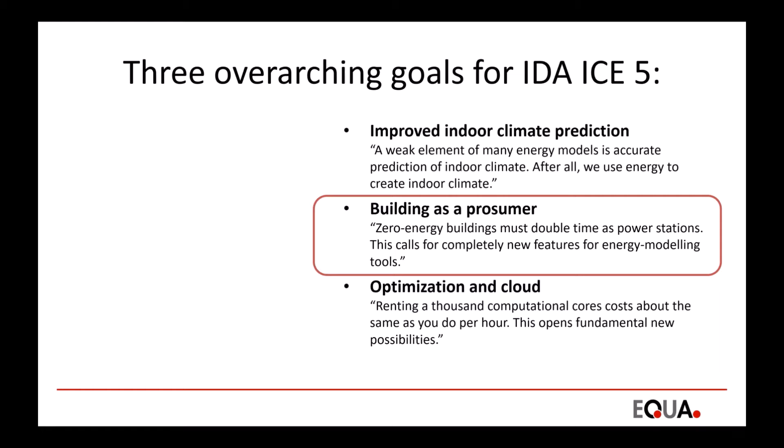Right, so IDEIS in the new energy landscape. I guess it hasn't escaped many of you that we're likely to have to change a lot in the way we live in the whole world. And as you know, buildings use a very large proportion of the energy flow in the world, and so we have a big responsibility on our shoulders. And in most building regulation schemes, there'll quite soon be a requirement for zero energy buildings. So what has been quite exotic so far will very soon be a reality in many places.

And in order to create a zero energy building, in most cases you will have to rely on PV. So that means that large portions of the surfaces of the building will be covered by PV. And that means that we can't just put PV like it has been mostly today in favorable and unshaded conditions, but we will have to put PV almost everywhere on a building, and also on partially shaded surfaces. And this is not so easy, as you will find out later; the shading of PV is far from a trivial issue. This is one of the big things we will talk about today.

And another reflection, I think, is that so far we've aimed at being able to predict energy use of a building as accurately as possible. We're talking about a few % off and so on. But on the other hand, so far when we've looked at the yield from a PV system, we've been happy with just getting some order of magnitude figures. But in a zero energy building, the PV yield will be just as important to get accurate as the energy use of the building. So that's something to bring with you as well.

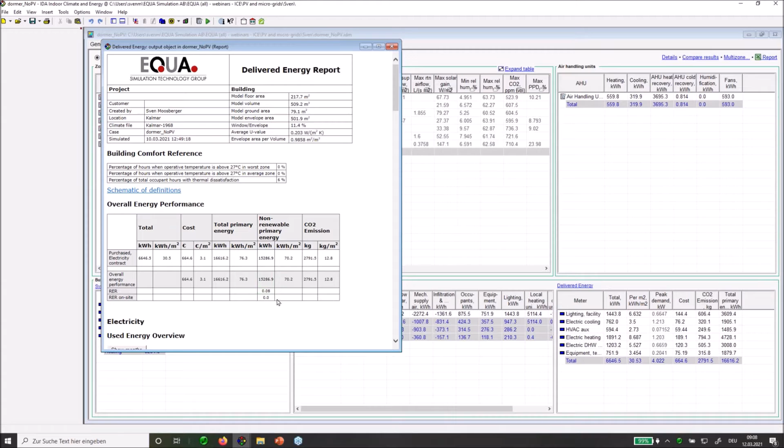So you see we have a use of 6.6 megawatt hours per year. We have the costs here, and due to the weighting factors we have quite a lot more primary energy need, so we have this factor of I think 2.5 here. There's also a renewable energy ratio, so the part of renewable primary energy that we use is just 6%, so it's not a lot.

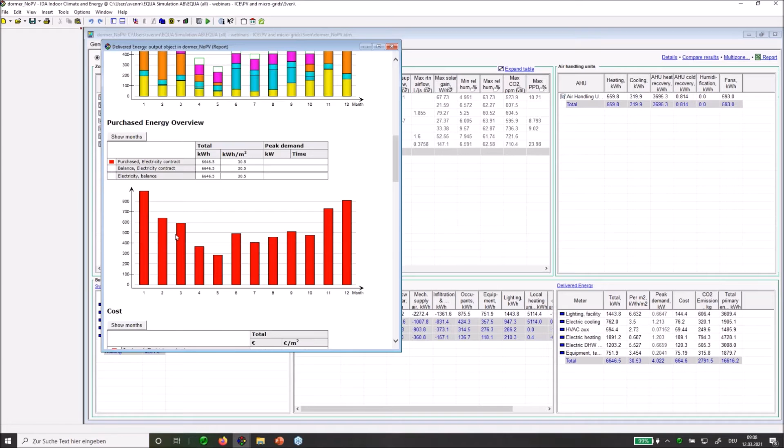Further below we can see the monthly values of the energy use, which corresponds to that of purchased electricity. So here is the purchased electricity, and it's actually twice the same. The values are divided among the different energy meters used in the model, as we already know from IDA ICE 4.8 actually.

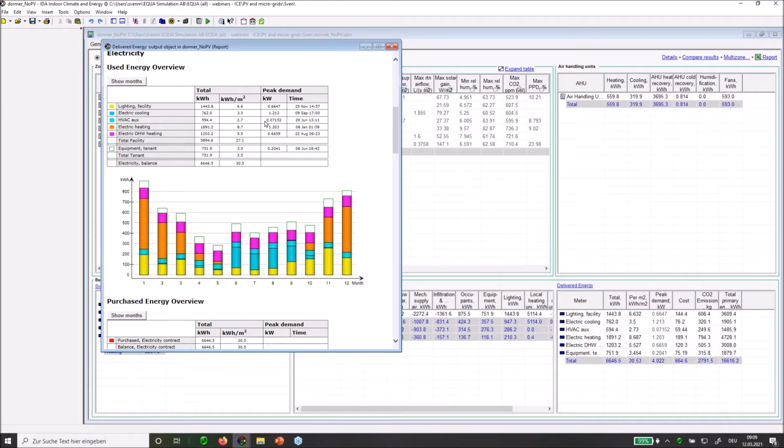So now we want to investigate what the energy performance of the house looks like when it is covered with PV.

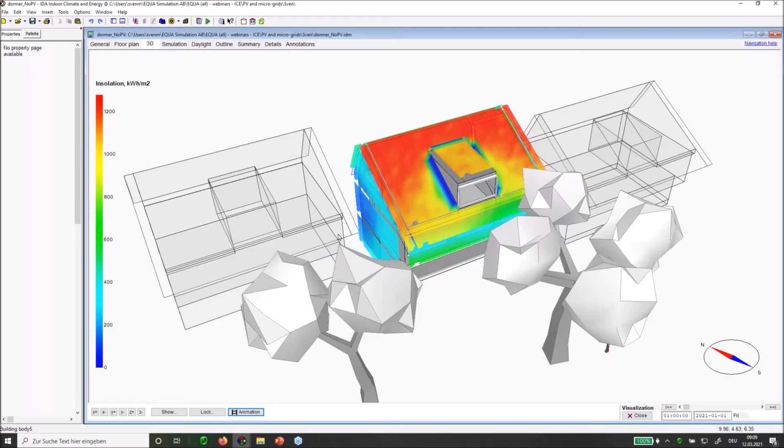We already have done a whole year daylight simulation, and we can have a look now at the yearly insolation on the surface of the building, and we can see that especially the upper part of the roof seems to be very good for being covered with PV.

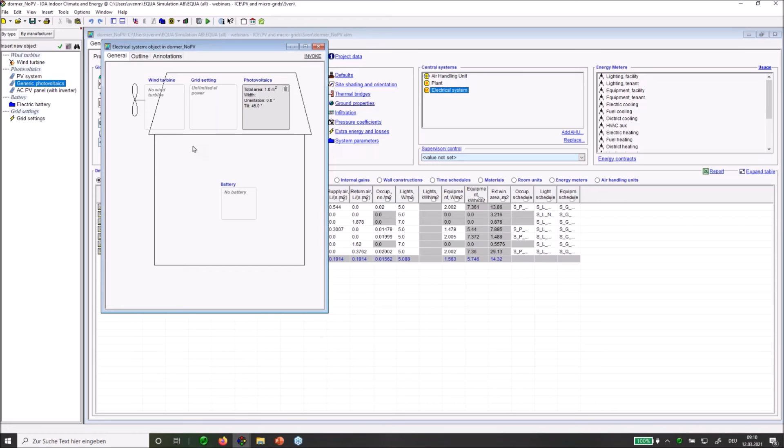So to start with the rough potential study, we insert from general view an electrical system to the central systems here. This is also a new object for IDA ICE 5. And here in the electrical system, first of all, we insert the generic photovoltaics, that's actually what you did in the plant in IDA ICE 4.8, so still not much new things, but here we can select one surface.

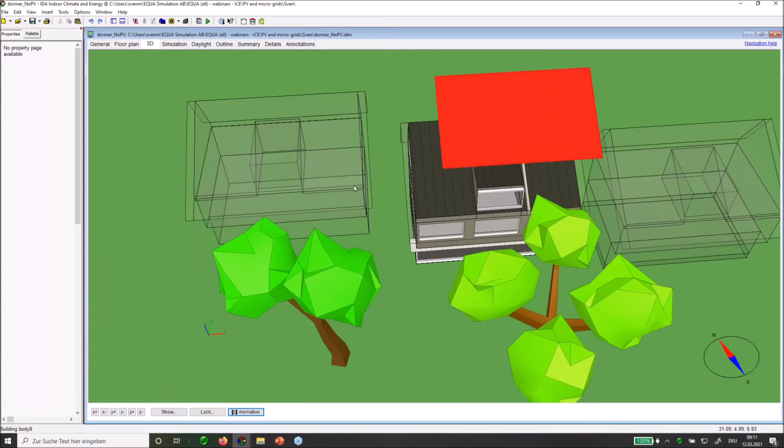I select 10 square meters and I select the orientation of my roof here. Also the overall efficiency of this PV can be selected here, and we'll find it in the 3D view. If you want, you can shift this panel to the right place, approximately, where you want to have it. I place it somewhere where it is unshaded - that's what I want to investigate, the potential of this roof area, very roughly.

Yeah, so this model was already done, and we can see the same results with this photovoltaics right now.

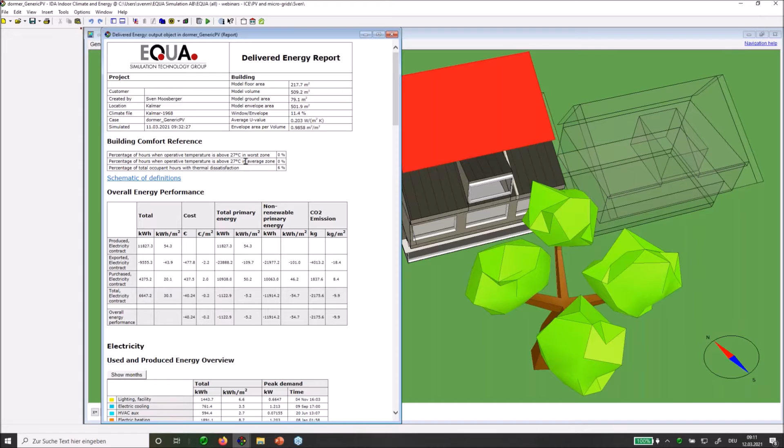Well, before we do that, I wanted to show again the energy contracts, because we don't only have rates here, weighting factors for import or for purchase, we also have it for export. You can see that the only relevant contract is the electrical contract here, and actually in our case now, all these ecological weighting factors are the same for import and export.

And ISO 52000-1 provides that when electricity that has not been certified is exported back to the grid, the weighting factors may remain the same, and thus the exported electricity is interpreted as avoiding consumption from the electricity mix. However, if there is a special compensation for solar electricity and you really sell solar electricity, only the correspondingly lower weighted electricity may be deducted from the consumption.

So if you sell electricity as solar energy, this primary energy factor will be 1, and the non-renewable will be 0. That means it will actually be less profit for your building if your goal is to reach a zero energy building, because you sell your solar electricity to someone else, and it is not rated for your building. That's the idea behind it.

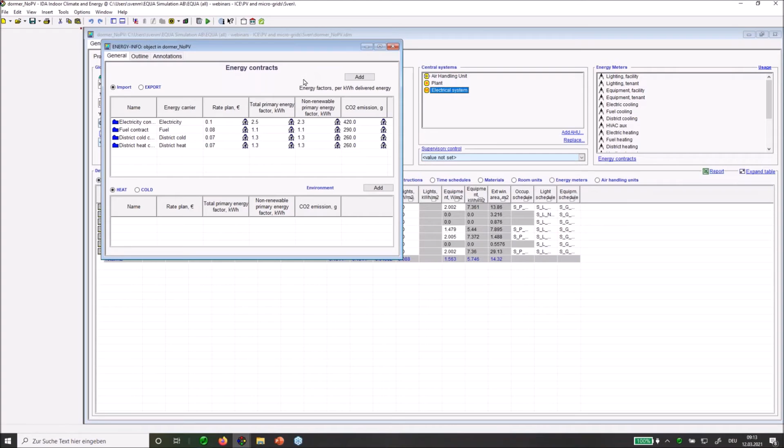So now looking at these results, we see that the total energy performance is now completed with 2 more rows. We have the purchased energy, which is now lower. The total is still 6.6 megawatt hours, but out of these we have to purchase 4.4, so it's actually still 2/3 of the whole usage.

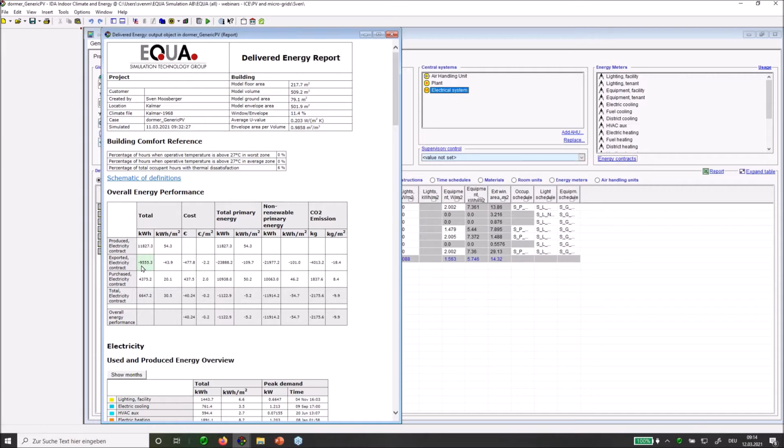But we also have a production which is much higher than that. You see that right now we have to export a lot of this. You can see it down here in the used and produced diagram. We still have the same electricity used as before, just on another scale. But now produced electricity is subtracted from it, so we have a total balance, and PV production actually exceeds the annual average use by far.

But not the same is true for the winter months. Here we still use more energy than we produce. So we can see here a seasonal asynchronity, we can say.

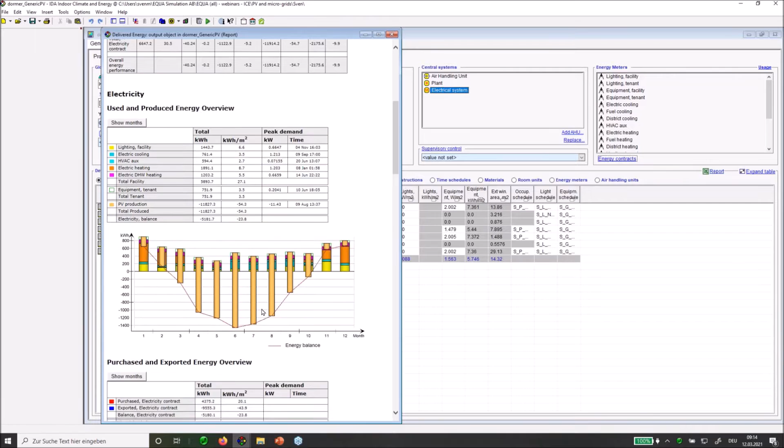In the purchased and exported overview, we can also see that even in the summer months we need to purchase electricity, and in the winter months we still export energy. Also, we actually need a lot. This is of course due to energy used during nighttime.

It should be clear that both difference curves here, used minus produced, and purchased minus exported, are the same. So going back to the first table, we can read that we still need to purchase this 2/3 here. That's what I mentioned already.

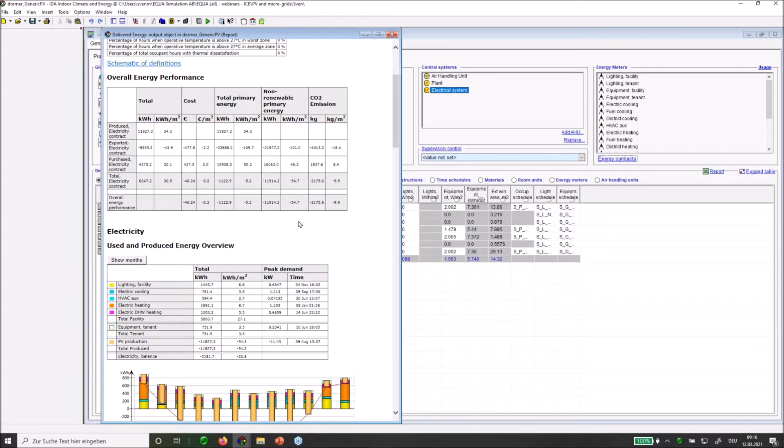But we also see that the total primary energy performance, for instance here, but also the total CO2 emission, even the costs, they are all negative, and this means actually that this house is more than a zero energy, it's actually a plus energy house in this moment. So that's because we have quite a big surface here.

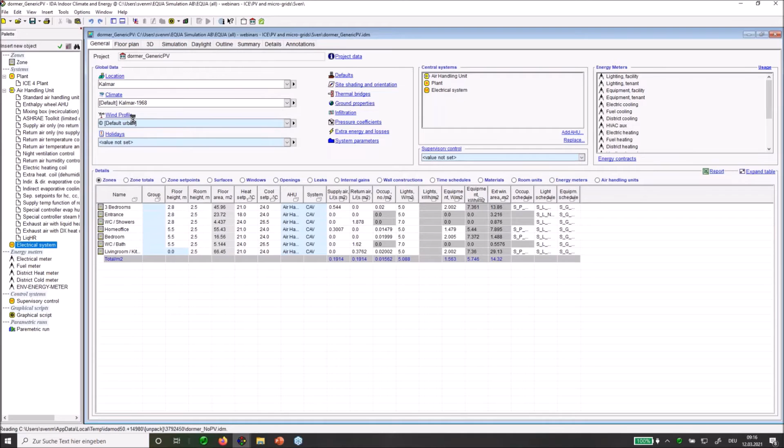Okay, I now close this and reopen the one without any PV. And I would like now to go a bit more into detail.

Here in the palette, in the 3D view, you can see that we have two kinds of PV panel. It's actually the PV panel, also called a DC panel, and we have an AC panel, which means that the panel itself contains an inverter. It also means that all the panels are kind of independent, so they can be shaded independently and will not mismatch. William will tell more about these things.

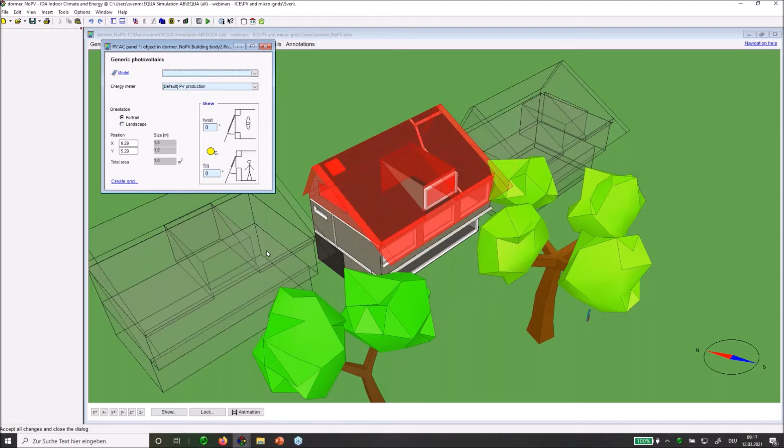So let's start with this AC panel. We insert this AC panel and select a model for that. Right now, if you look at this model, you can see that there is an included inverter there. So we place it here and make a grid.

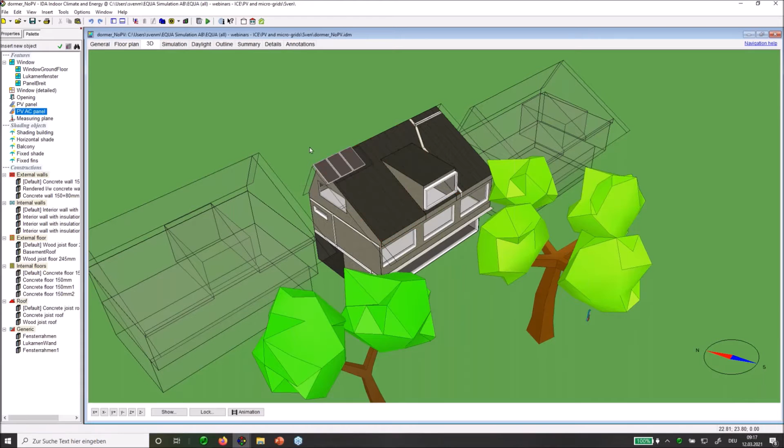I start with 3 panels. It's a small workaround because I need to place this panel now a bit to the edge here, because I want to select actually 11 panels now. I have to calculate X max and keep X step here in order to get these 11 panels on my roof.

This is probably not enough. We saw before in the yearly irradiation that this dormer roof can be good. So I place another panel here. Actually, I need to place it somewhere here.

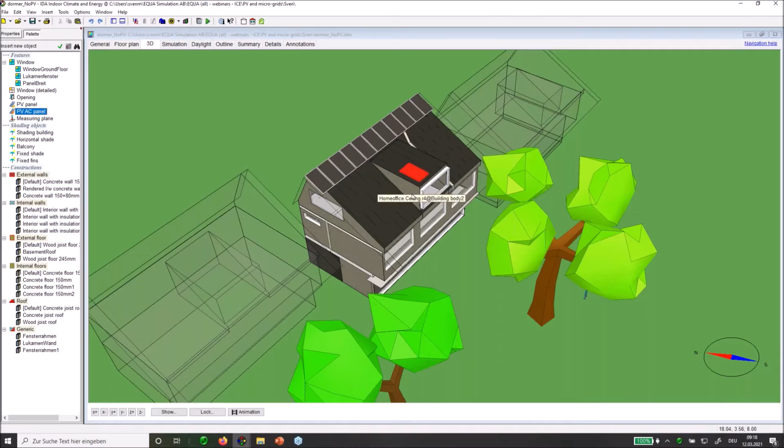And before I do the grid, I do here a tilt as well, a tilt angle. It must be negative in order to be tilted the right way. So you see that we can slightly tilt that. You will see soon why.

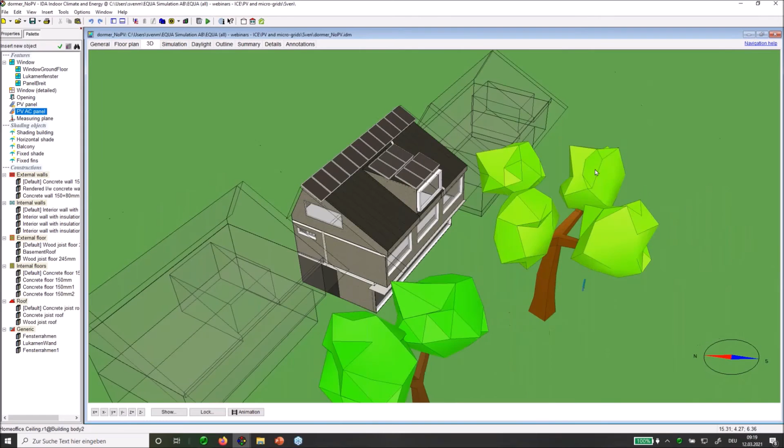I will do 2 rows and 3 columns, and the distance in the rows should be 2 meters. And like this, you will see, this is about the view of the sun, that we have no self-shading between these rows, or almost no shading.

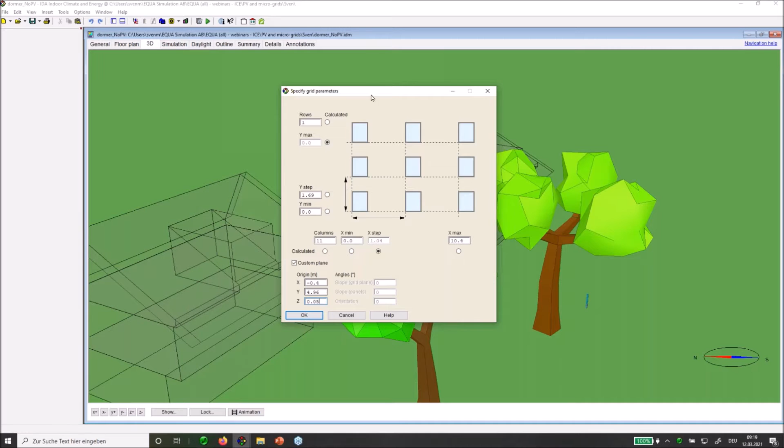In this field, in these strings, we can also insert a gap, so we can make a distance in the Z direction. That means that if you have a look now at these cells, they jumped a bit in distance from the roof, and you can see now there is a small gap. It's also possible to open that and change the thickness of the gap.

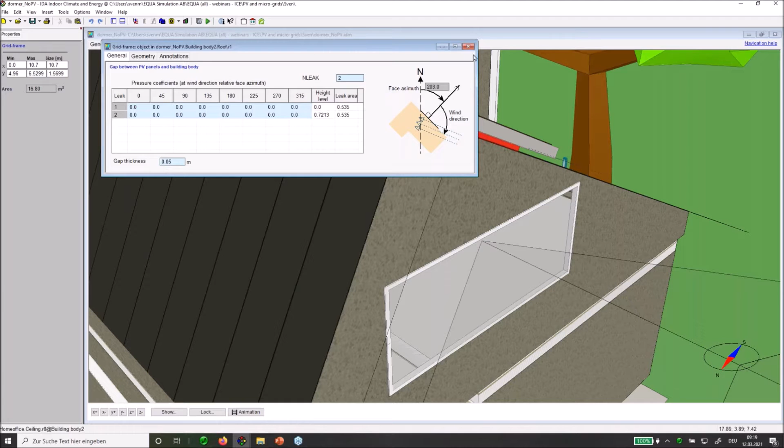There are some leaks and so on. It's to calculate the backside ventilation, they will cool the solar cells, and this will be good for efficiency.

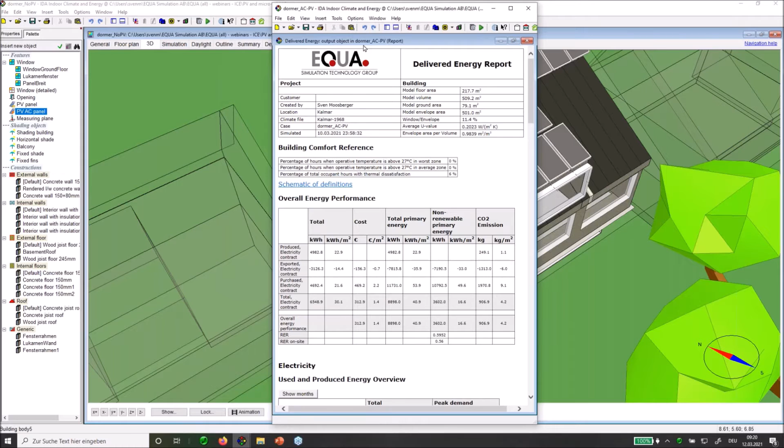So we now go to the result of this case. Let's first start here. You can see that we now produce 5,000 kilowatt hours, so it's almost the same amount as the 6.5 that we use.

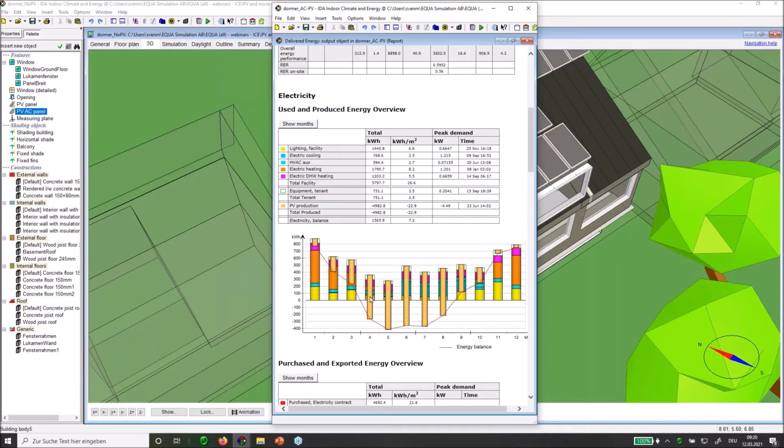And in the use-produced diagram, we can see that we now use slightly less heating energy. Well, before it was slightly more. Let me jump back to show the right diagram.

So electricity for heating was 2,890, now it's 1,790. This is due to the PV backside ventilation gap I just showed. It is thermally connected to the roof and now helps heat the building a bit.

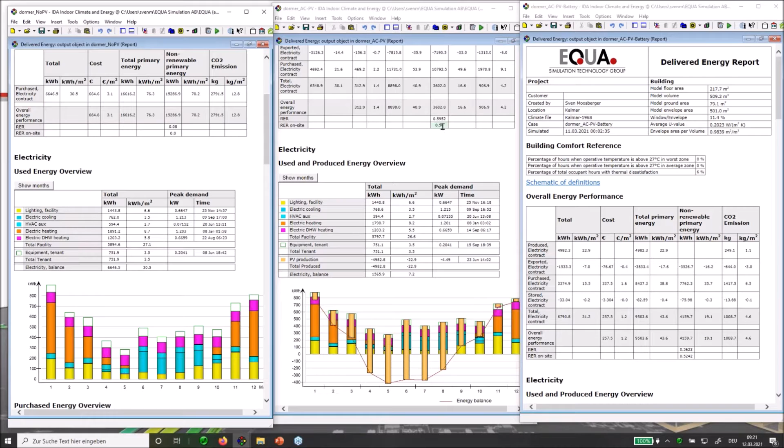We can also see that now we have a higher renewable energy ratio of 60%, instead of 8% before. This is the on-site produced part, and it's slightly lower.

Looking at the purchase and export energy overview, we can again see that we have to purchase electricity also during the summer here. And we export a bit during winter.

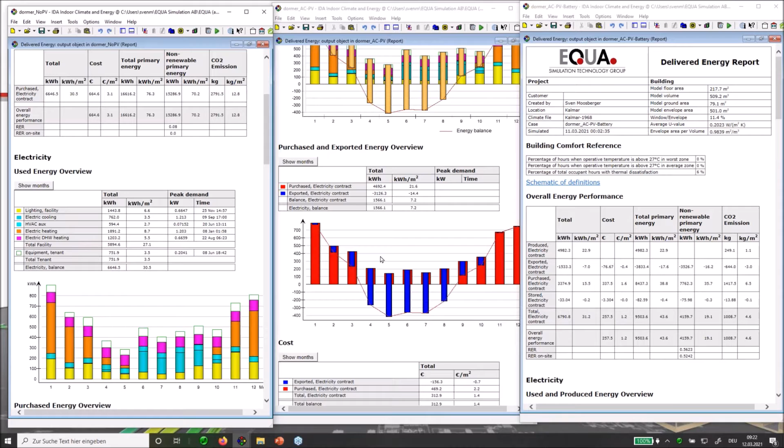And to avoid this, we can now insert a battery. So let's do that.

We go back to the electrical system, and here we can insert the battery also. We can load a product here, and we can size this by selecting the number of units. We also have to select a charger.

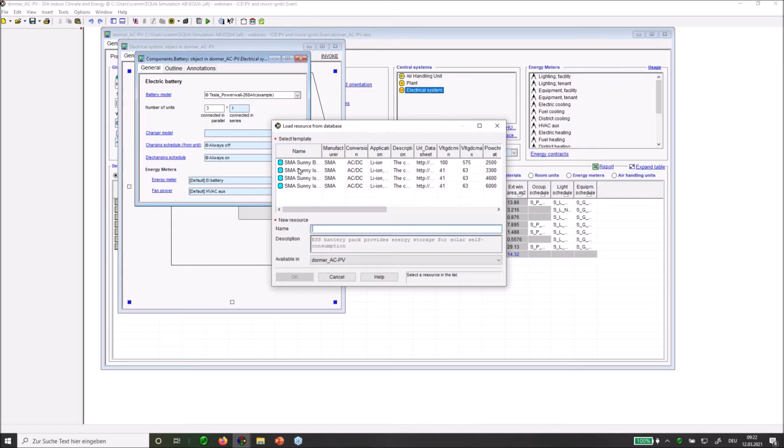With the charging and discharging schedules here, we can define time periods when charging from the grid is allowed, or discharging for electricity use is allowed. With this, we'll get quite good synchronicity in the end.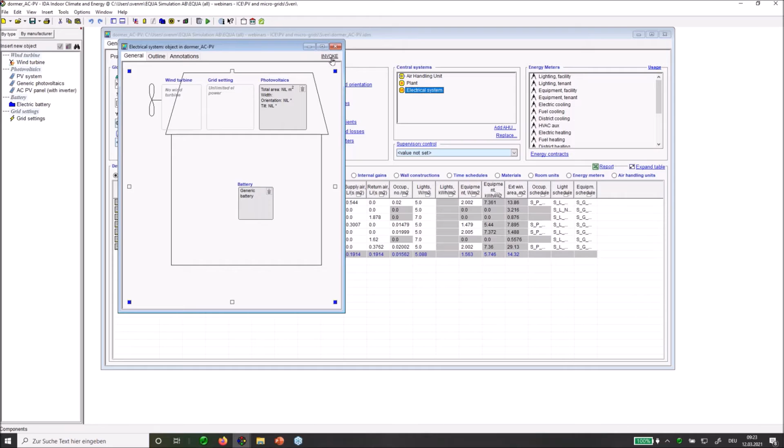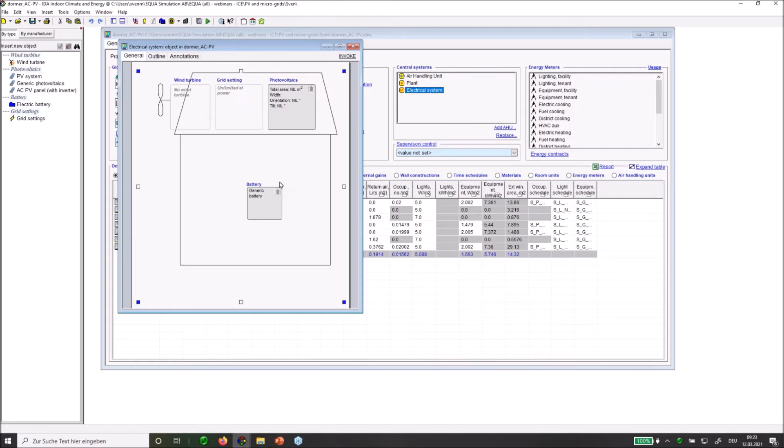Let's try to show that you can now invoke this. Oh no, you can't. Let's skip that. So as you're used to in the plant, you can invoke this and build the schematic just of the electrical system. I don't know why it doesn't work right now.

Let's see, if you just run it for maybe one or two seconds, then the invoking works. So, I just started it. If you simulate a small run... okay, maybe that's enough, you can cancel it. I could maybe even... and now it's built already.

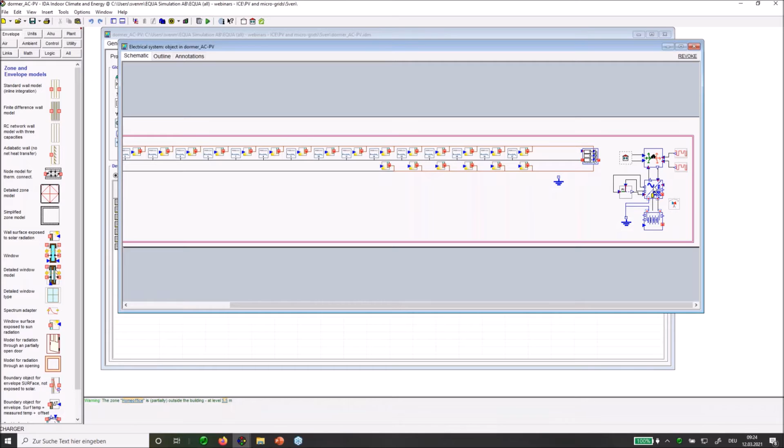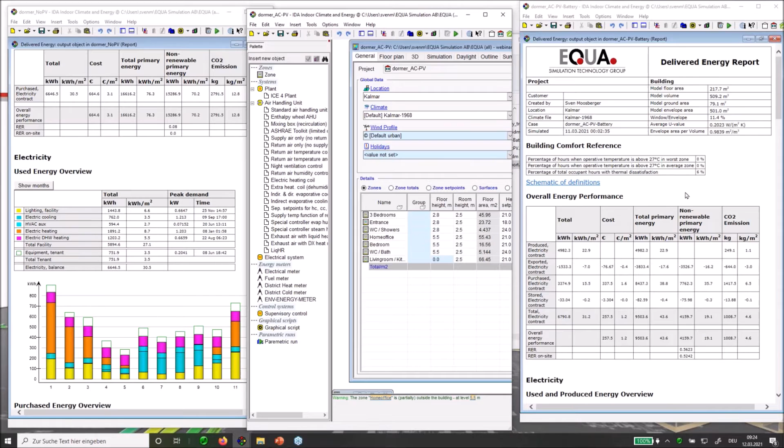With our battery now, we can see that this is different here. So we only export in summer and we only purchase in winter, because the battery can save electricity from day to night, of course. But we also see that we have a bit of battery losses here, actually, and that's the gray part of this, so we use a bit of electricity for that.

We pay for that a little bit. And actually, at the end, these results here are not really better. I think it's just the costs that we profit from, and our primary energy is not better due to that.

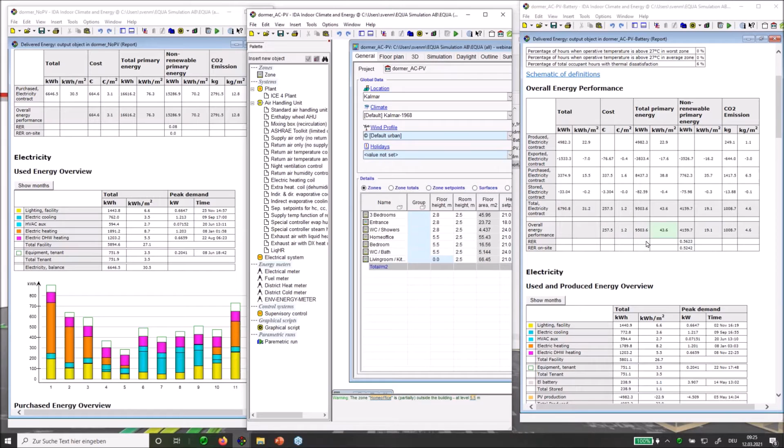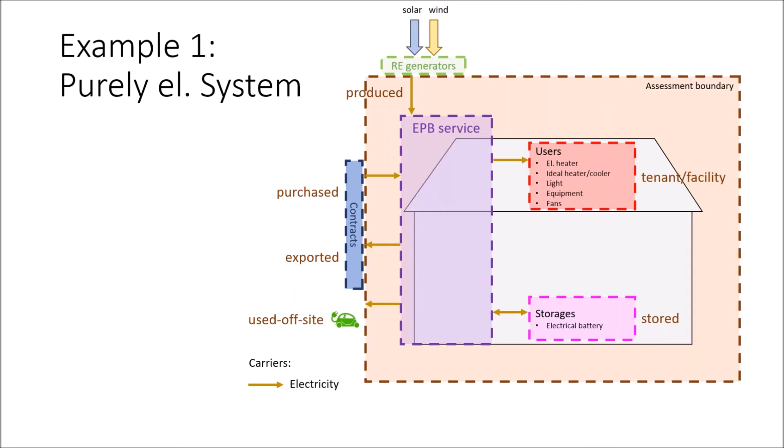So that's about it for the demo. I just wanted to show you a few slides to mention that what we looked at now was a purely electrical system, actually. However, the whole energy reporting will be extended later, on the one hand with further report possibilities, and on the other hand, the same approach should be possible with different energy carriers.

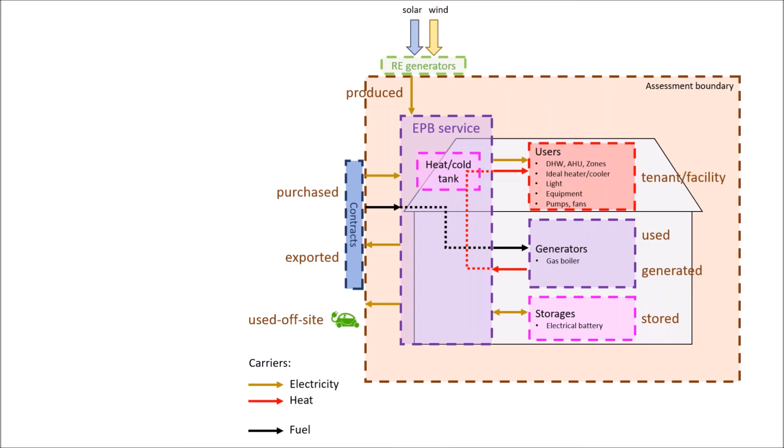Fuel, for instance, can be purchased from other contracts and used by a gas boiler here that generates heat. And after optional storage, this heat can be used within the building. System heat losses can occur, as well as heat recovery.

Other energy sources at the assessment boundary here can be environment heat, and that's also something we need to develop a little bit further to cover that in the sense of the ISO standard. Such usually low-temperature heat can then be used by other generators called heat pumps, which together with the use of electricity will generate higher temperature heat that again can be used in the building.

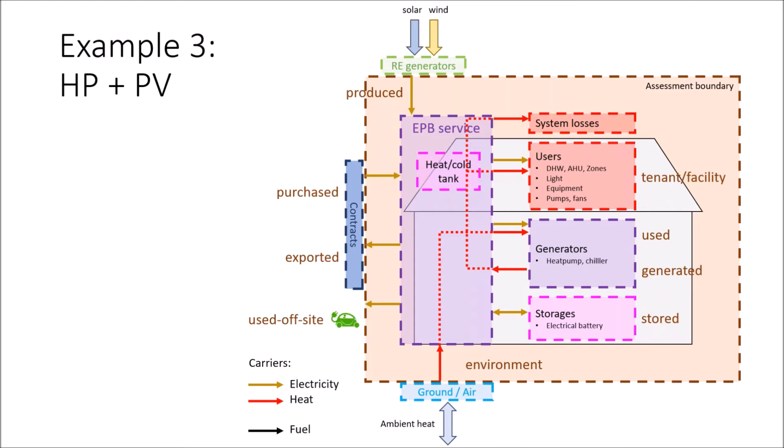Just before I introduce William, I just wanted to say that it was in a sense good that Sven ran into a little bug here, because there are quite a lot of problems still that we haven't been able to fix fully. Another thing is that this reporting framework, this ISO standard that Sven was talking about, is also incomplete, I would say, for two reasons. One is that we just haven't had time to finish all of these things properly, so there's still things to do in the coming beta releases, but also this ISO standard is very complicated, and there's actually controversy around how to interpret some of these things.

So it's not crystal clear how to do this if you read the standard, and we're trying to navigate between different countries' interpretation of this and find our own. So this is quite complex territory, and this is probably going to be with us for a while, and you will have to bear with us and with the people working on this standard to get this right. But it's uncontroversial that there are a lot of things to think about here with these weighting factors and all of the different energy conversions that will be possible, and a new framework for keeping track of this is absolutely needed and right.

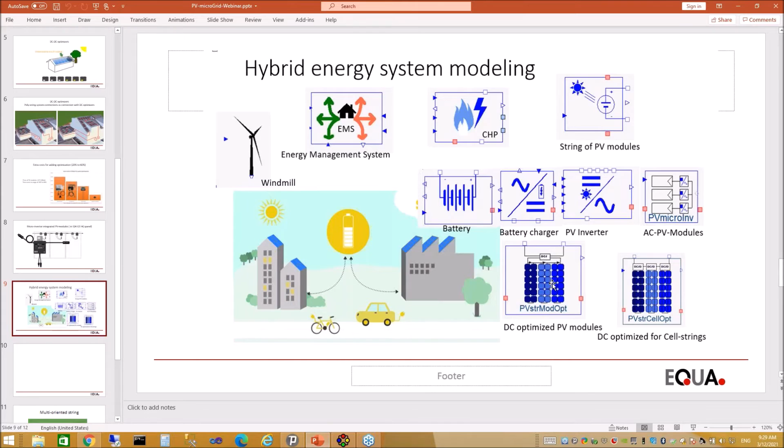So I'm starting with some basics, and I'm sure that most of you know much more details about the basics which I'm going to talk about, but it's very important to start with them, and it will help us to understand more about what we have in IDA ICE for PV systems. So let's start from what is a PV panel, what is a PV string. We can say that the majority of the market right now belongs to monocrystalline and polycrystalline silicon technology, and especially PV modules based on 60 cells and 72 cells. So we are mainly discussing this type in this presentation.

So if we look at this example of a PV module, it consists of 60 cells, and as you see, the cells are connected in series to form cell strings, and each cell string inside the PV module can be switched off and on by the bypass diode which is connected to it. So in case of any small amount of shade on one of the cells, the bypass diode can be activated, and due to its activation, this part of the panel can be switched off. We name it submodule or cell string.

So during shading, this submodule can be switched off, to minimize the effect on the rest of the string, and also for the protection of the cells and the modules. So if we talk about the 60-cell and 72-cell modules, sorry, I should go back to the first step. Normally we call it a standard PV module because most of the products in the market are compatible with this type of panel. So DC optimizers, microinverters, and even string inverters are compatible with this type of cell technology.

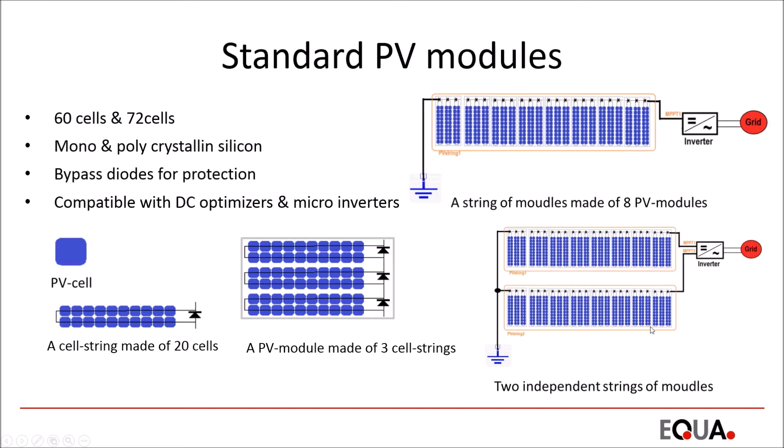The next slide is about the DC optimizer. Normally DC optimizers are available in two types. One type of DC optimizer is for each panel. The output of each panel is connected to the optimizer, and on the other side, the optimizer can regulate the current to the current of the string. In these cases, it can increase the current to reach the current of the string to reduce the mismatch losses.

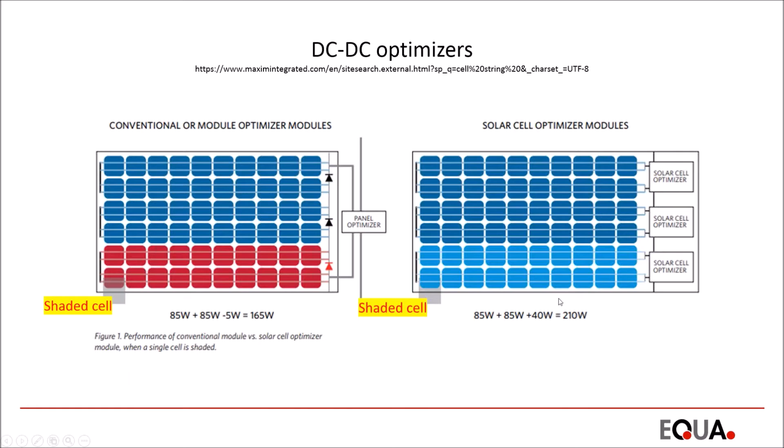With exactly the same condition on the other module, with the integrated optimizer instead of the bypass diode, we can see that even during that shade, that part is not switched off, so it can still produce about 50% of the power. So we can extract much more power, especially with this type of DC optimizer. So an application of DC optimizers can be, for example, reducing the effect of shade on the string.

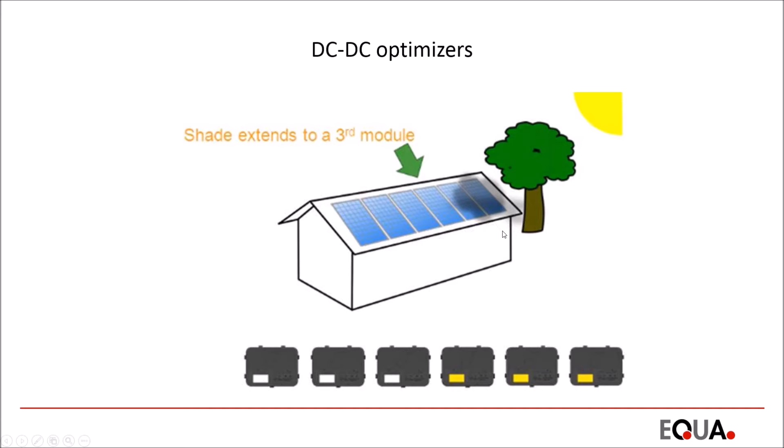On a string we have about 6 panels, and 3 of them have the potential of receiving shade from this shade object. So if we add some optimizers to those panels, probably we can get better production out of this PV system.

Another type of application where we can use the DC optimizer is like this. We have a building with several orientations, and we want to make just one string for all of them. So it is possible to add optimizers to those panels, connect them in series in one string, and then connect them to the input of an inverter. The other conventional method is to have different strings, one string here and another string here, and each string can be connected to one independent MPPT of the inverter.

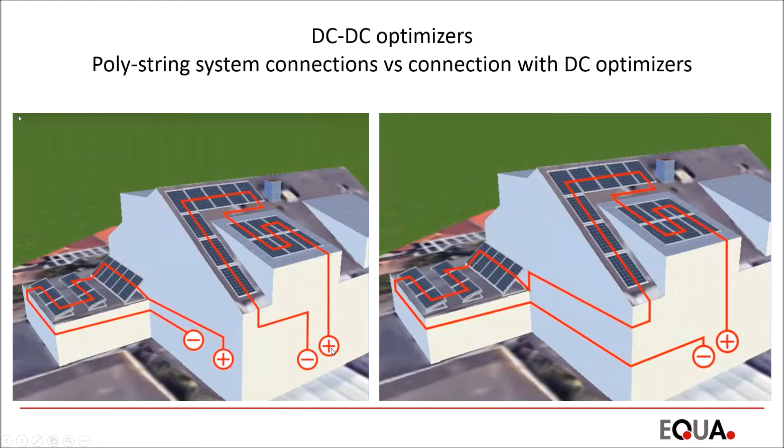So let's see about the economy, because when we produce electricity we should always consider the cost of the production. Adding the optimizer can of course increase the production, but it also involves a 20% to 60% increase in cost. This 20% is regarding the reference price for the PV module, so if we consider 50 cents per watt for the PV module, then the 20% to 60% extra should be considered.

So this is about the microinverter, which Sven talked about. Each PV panel has a small inverter connected to it. It has the highest flexibility, because it's possible to have just one panel and one inverter, produce power and use the power. And at any time the system can be scaled up to any size. In IDA ICE we have it under the name AC panel, which means a DC panel integrated with a microinverter.

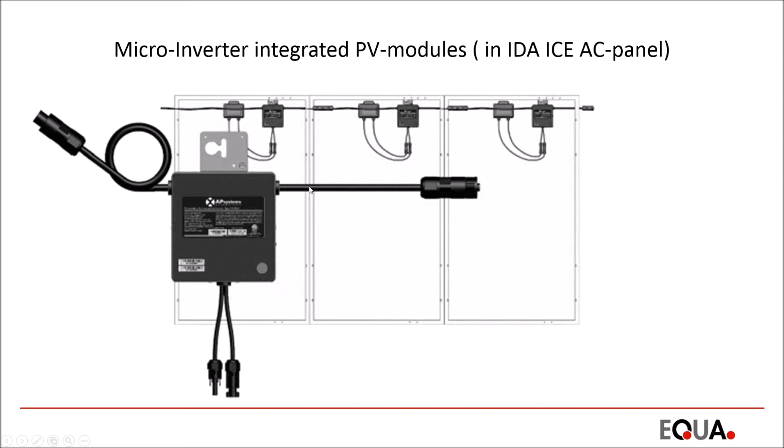In the IDA ICE we have different models for production of electricity from renewable sources, for example from wind turbines and from photovoltaic systems with different components. We can also use fuel burning systems such as CHP to produce heat and power at the same time. We have the possibility to use a battery to store electricity, and this battery will increase the self-consumption of the locally produced electricity, which is very important in hybrid energy systems and microgrid applications. We have the charger for the battery and the energy management system, which decides how to cycle the battery and how to interact with the grid and the loads.

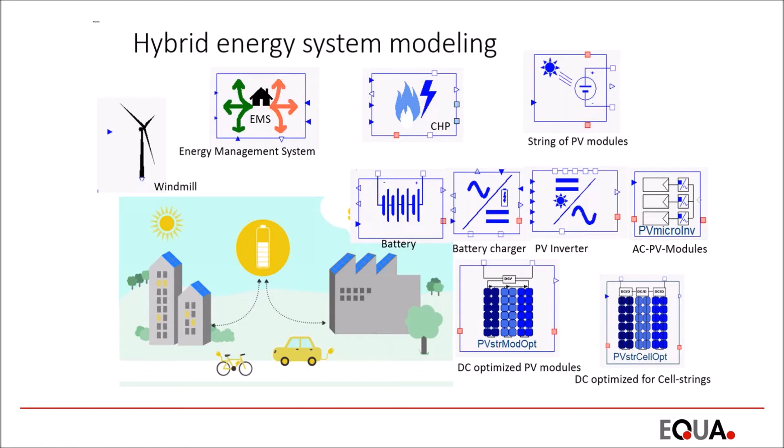In the battery, we also have the possibility to consider the aging effect due to calendar life and cycling. The battery can also model different types of technology: lithium battery technology, lead acid battery, and also nickel metal hydride technology. So this was the first part of my presentation, about some basics. Now it's good to take a look at running a demo in the IDA ICE.

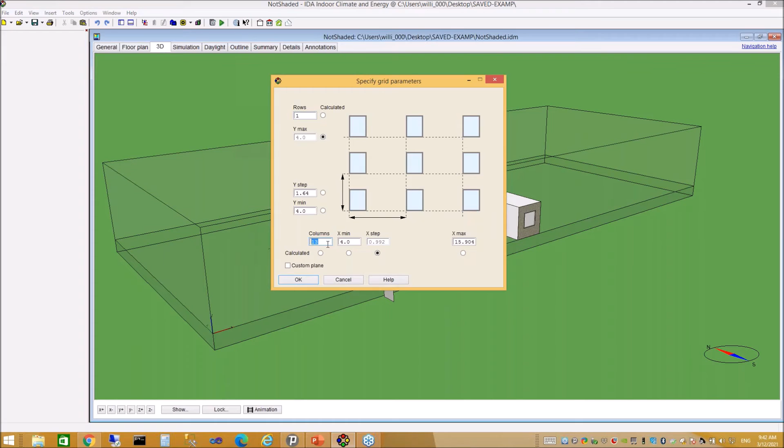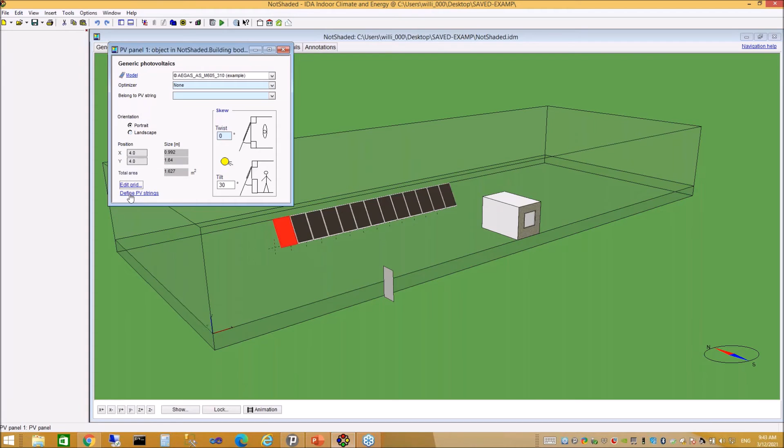So here we have a string. I use a saved model to save a little bit of time. In this model, we have placed some photovoltaic panels on the front side of the building. There is a small shade object here, but now it is not affecting the system. I will show you how we can make a string from these panels. If you open one of the panels here, we can see that the number of panels used here is 13. You can always use a different number here. We want to make a string to connect them and select an inverter for this number of panels. So from this view, you can click on defining PV string, and in the palette just add a new string.

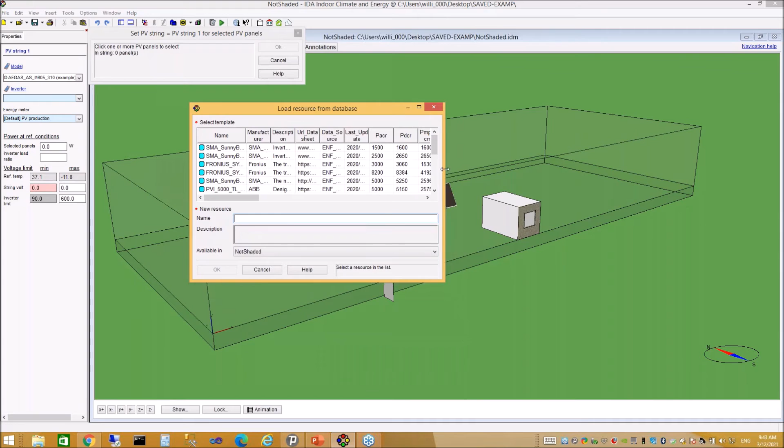And here, from the database, we need to find one suitable inverter. As we plan to have just one string, we search for an inverter that has just one MPPT input. So probably this one with the capacity of 2.5 kilowatt should be enough. Let's see. So we have selected an inverter, and now for this inverter it shows us the limitation of the voltage. For this inverter, the maximum voltage is 600 volt and the minimum operating voltage is 260.

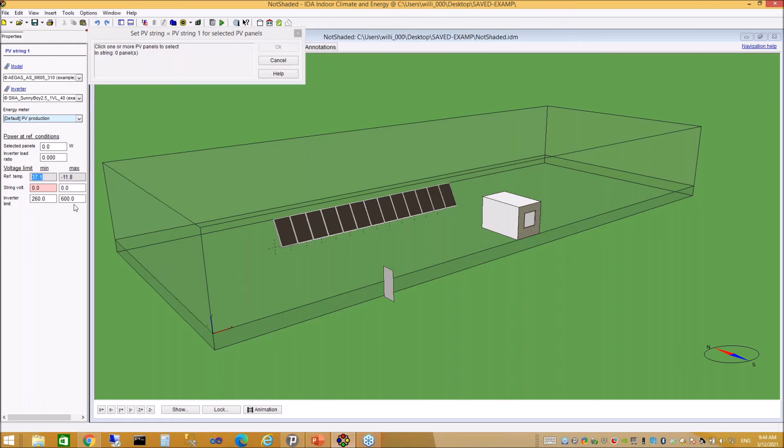This voltage is the operating voltage. This voltage is normally the open circuit voltage of the string. And this open circuit voltage is based on the temperature of the site, which for this case is -11, and for the operating temperature we normally consider the highest temperature in the site, which is around 37. So this is for the string and this is for the inverter. By selecting the string, the voltage will be added. You see we have the capacity selected, and this is the load ratio between the string and the inverter. It's quite okay to have something in the range of 1 to 2 for the load ratio.

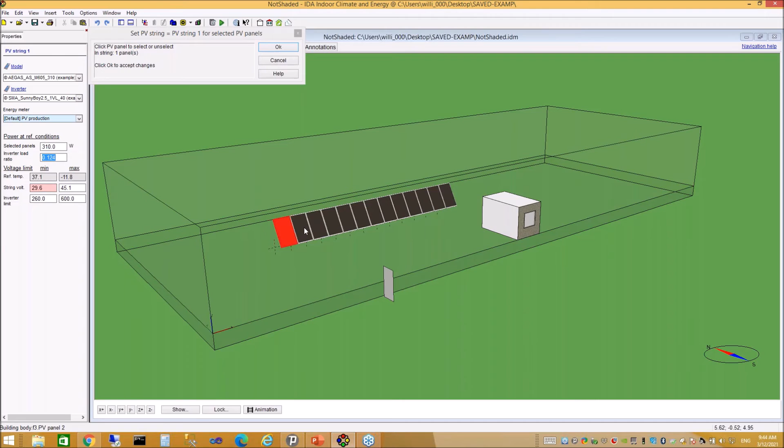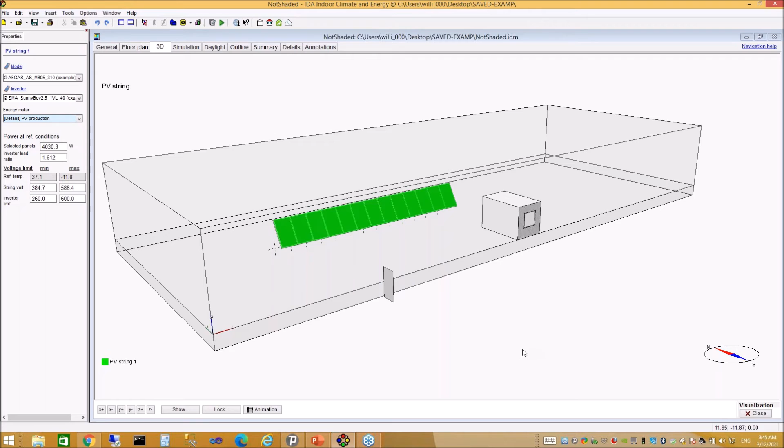And I just continue to do selection of the panels, and by this selection I am adding them to the string, and electrically I am connecting them in series. So you see all of them are connected. The total open circuit voltage in the cold temperature of -11 is less than 600, so this is quite good, and the operating voltage in normal condition is higher than 260. So the system is quite okay, and the load ratio is 1.6, so it's quite in range. So now we have finished with the stringing, and it is ready for simulation.

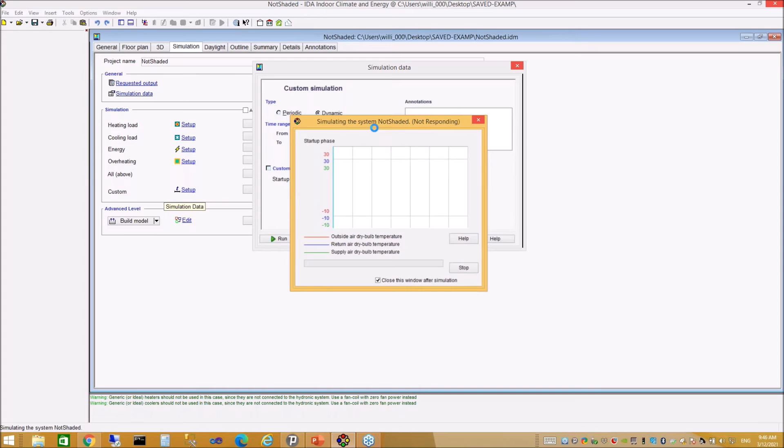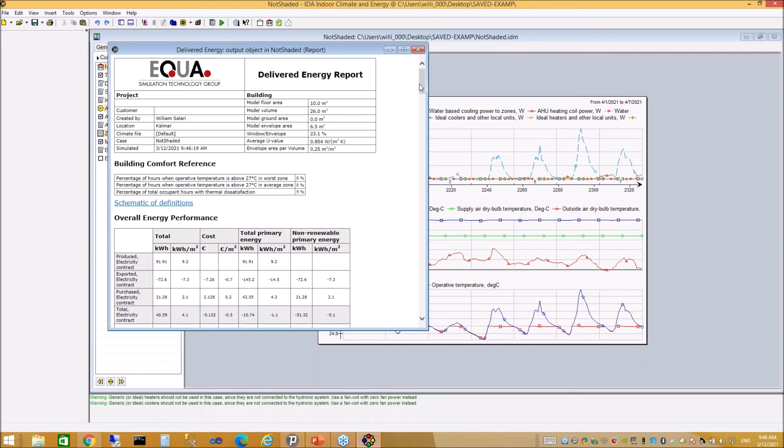For simulation, I just considered 1 week during April, to be able to have a quick simulation run. And for this case, I will see how much is the production of the string for this period. Let's see. It becomes a little bit slow right now. Okay, and from details in the delivered energy report, we can see that under no shade condition, the production for 1 week is about 92 kilowatt hour of electricity.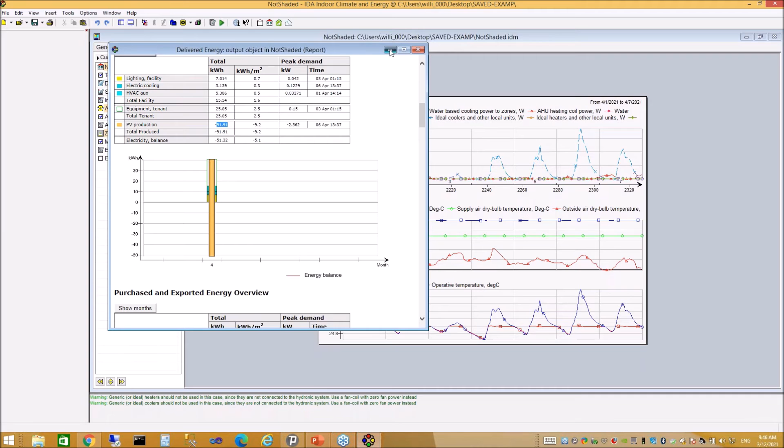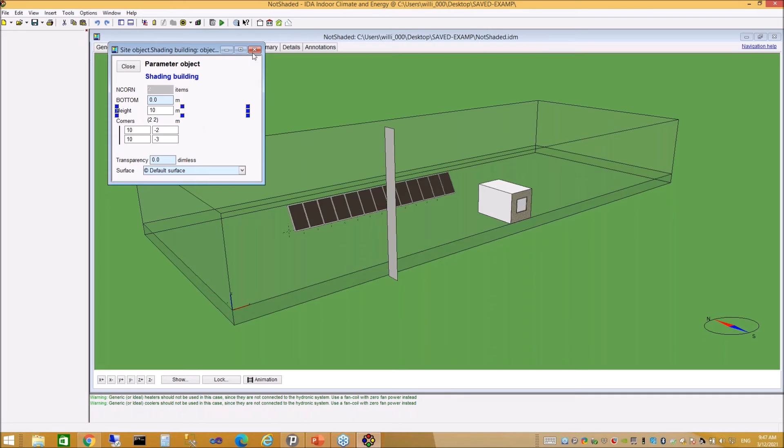Okay, so let me increase the shading object to be able to have a little bit of shade on the system. I will increase the height of this object to 10. And now we can also graphically visualize the shade. So you see that the shading is affecting almost all of the panels. And now if I just quickly run one more simulation, we can see the effect of just this level of shade on the string.

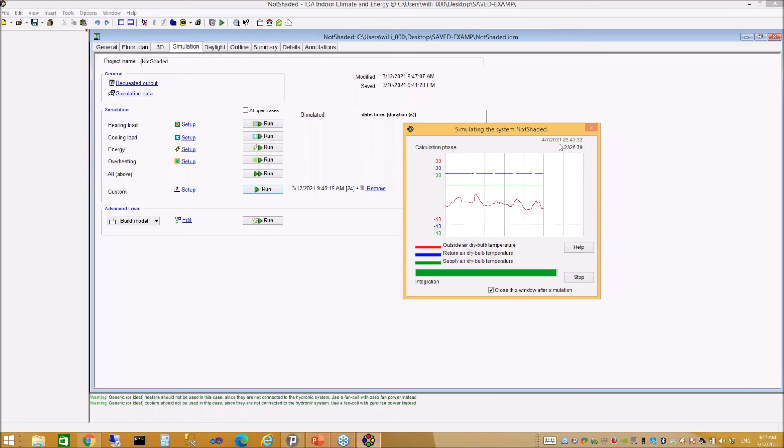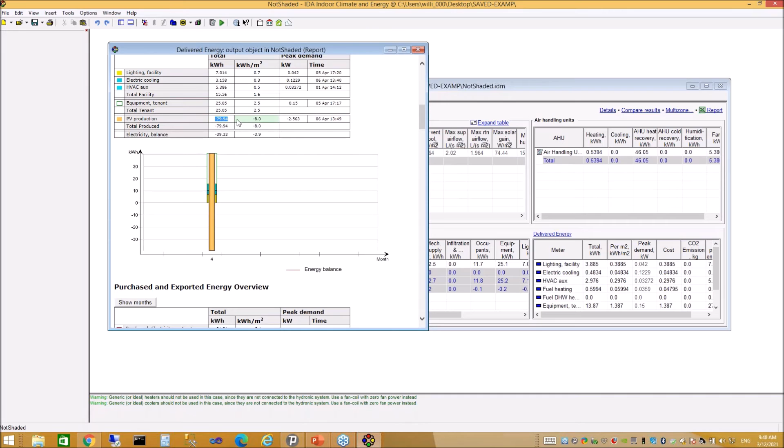So it's almost finished. And from the delivered energy report again, we have it here. If you remember, it was 92 kilowatt hour, and now we reached almost 80. So it's about probably 15% reduction just due to this amount of shading on the system.

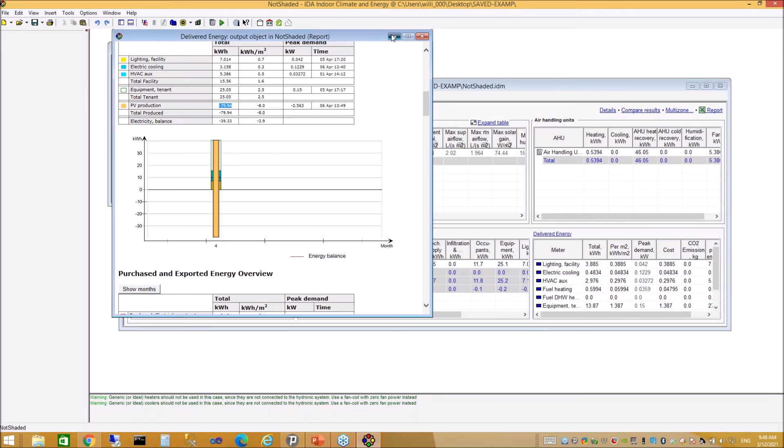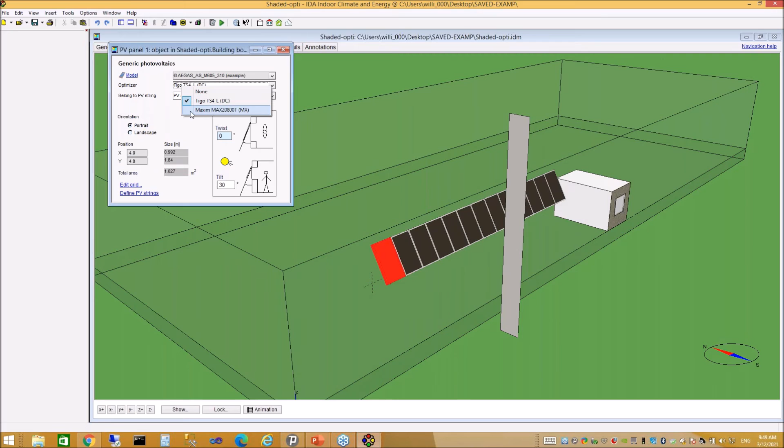So now I show you an example I saved of how we can minimize or reduce the shade by using optimizers on the system. Let me just close this one. And I have another example here. For exactly the same string, I consider the DC optimizer at module level. If you look into this area, we have the optimizer, and we can have none, which means no optimizer in the panel, a module level optimizer, which is the second one, and the third one, the cell string level optimizer. In this case, I consider the module level optimizer for all of the panels in the string.

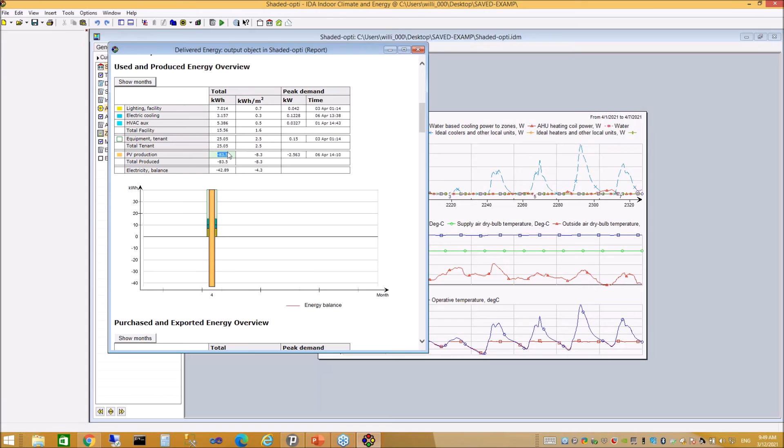And if you want to see the result of adding those optimizers, we can see it from the already made simulation. So the result is about 83. It was 80 kilowatt hour before using the optimizer, but after using the optimizer we were able to increase the production by 3.5 kilowatt hour, and this level of production is just for 1 week during April. So you can estimate how much it can be, or maybe you can run a full-year simulation instead.

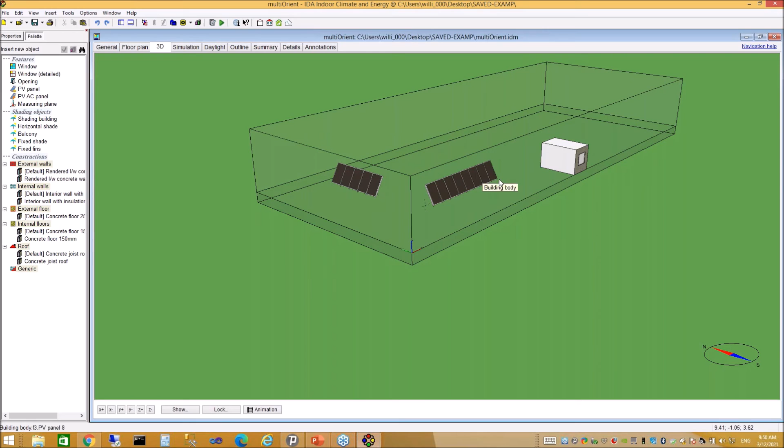So this was about the effect of the optimizer just for shade removing. And now we have another example, which will show you another application of using the optimizer. So we have a string here. In this string, all of the panels belong to one string and are connected to one inverter. In that case, because they have different orientations, it causes a lot of mismatch in the system.

So if we just want to see how much its production is without any optimization of this string, we can take a look at the delivered energy report to see how much the production is and how much we can improve it. So it is about 69 kilowatt hours for 1 week, the production of this string with this condition.

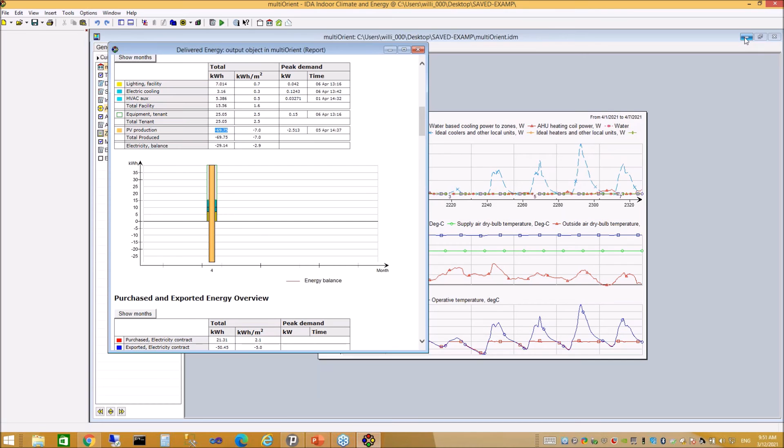Now I open another case, which is an optimized version of the same system. So now every panel has this optimizer on it. And if we see the calculation result from the energy delivery report, we can see that the production increased to 82. So if you remember, it was 69 without the optimizer, but it reached 82. So it's roughly about maybe 15% extra production by using the optimizer.

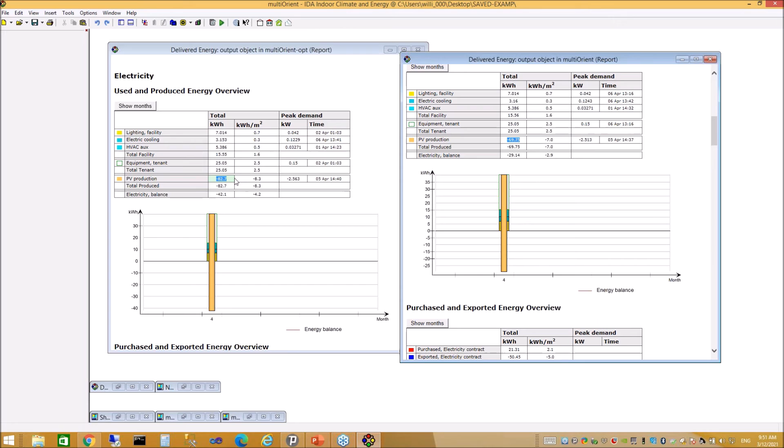So this was my example of running a system, stringing, and also comparing some optimization.